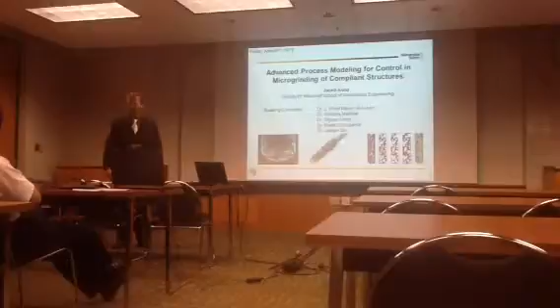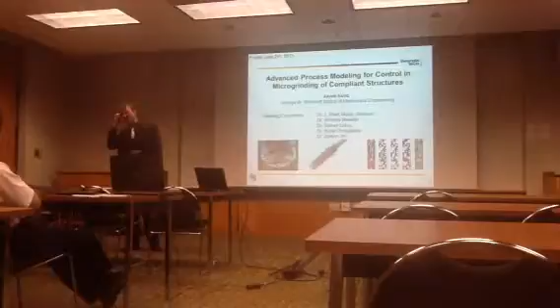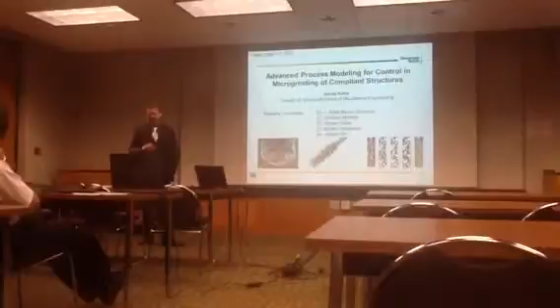The title of my thesis is Advanced Process Modeling for Control in Microgrinding of Compliant Structures. So the application, why do we need this?

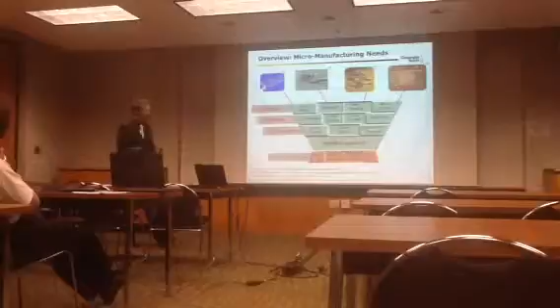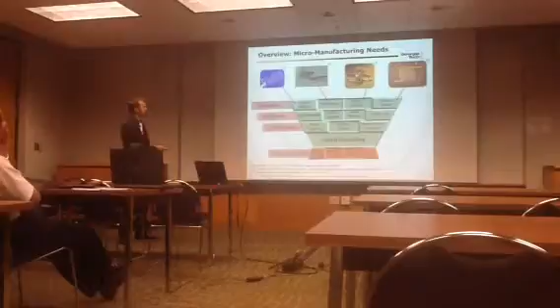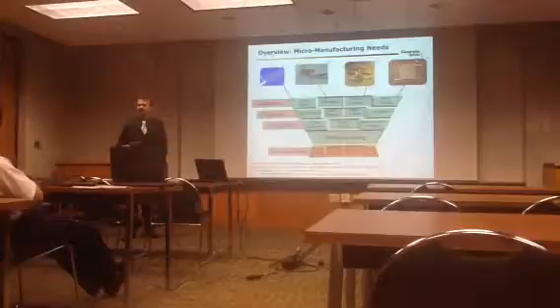There's a growing need in the micro part industry for very hard materials with high aspect ratio features. I've given examples in a couple of different industries. To make these micro high aspect ratio features in hard materials, we have process needs including super abrasives harder than the workpiece itself, precise control, and for sustainability purposes, doing this without large machines consuming a lot of energy.

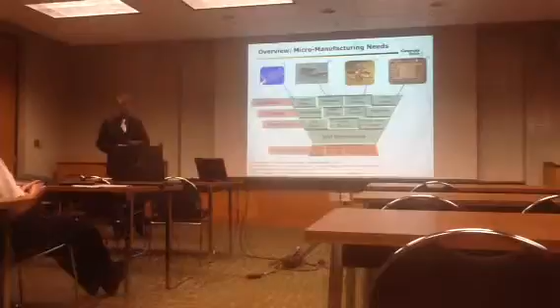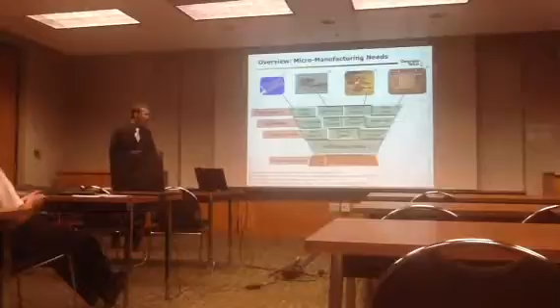I think high aspect ratio microgrinding fulfills this, and to facilitate that we need a couple of technology advancements. I've listed a few at the bottom, and what this work addresses is really the wheel model and the process dynamics.

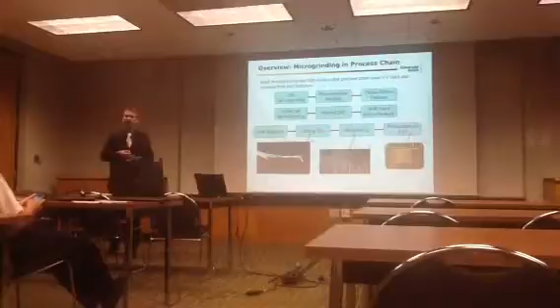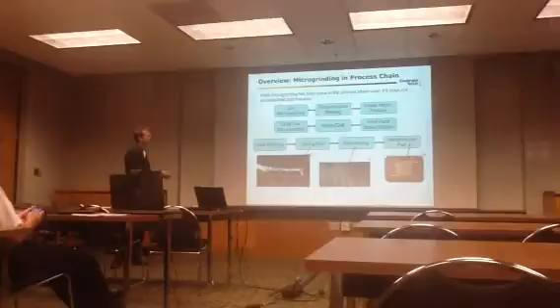Microgrinding itself doesn't have to be used to make final part geometries, but it's often inserted upstream in the process chain to make tools that then make microfeatures. For example, this copper microchannel heat exchanger was made by micromilling, and I'm proposing microgrinding could come upstream to actually make those tools.

For today's outline, I'll go through a quick introduction of microgrinding, then present a stochastic analytic model of the wheel topography, followed by actual measurements of microgrinding wheels to show whether or not that model is accurate. Then we'll go to stochastic modeling and measurement of dynamic wheel topography during actual grinding, ending with conclusions, a summary, and an outlook of where we go from here.

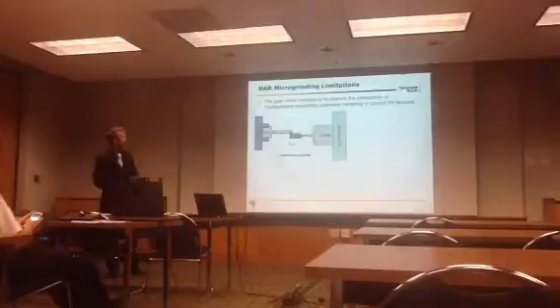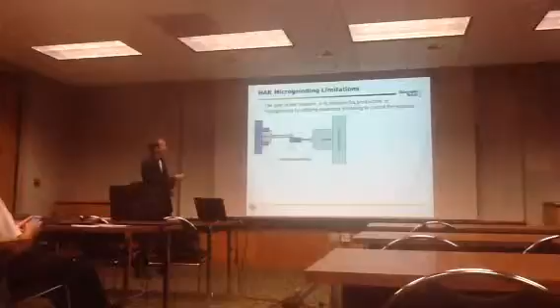So high aspect ratio microgrinding - this is what it actually looks like. We have a workpiece; by high aspect ratio I mean a small cross section with a very long workpiece, so a lot of compliance on the workpiece side. Microgrinding tools are themselves high aspect ratio, in ultra high speed spindles that also have a large amount of compliance.

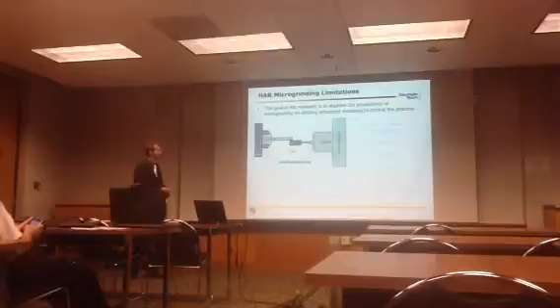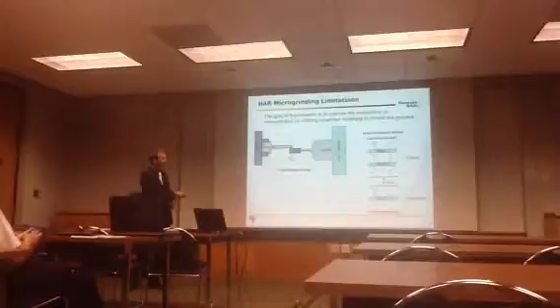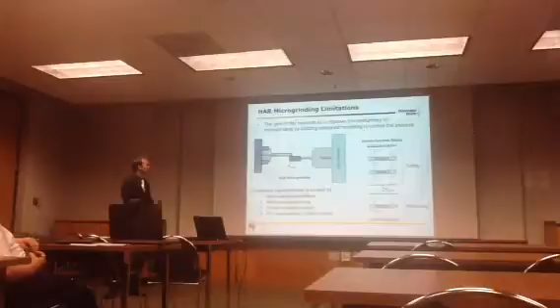If we model this system dynamically, we have several lumped masses, varying stiffnesses and damping, and linking these two systems is the grind force in the middle, so we need to understand that better. The limits of this process are really the stiffness of the fixturing, tool, and workpiece, and the ability to control all this compliance and understand the chatter coming from the driving force of the grinding action.

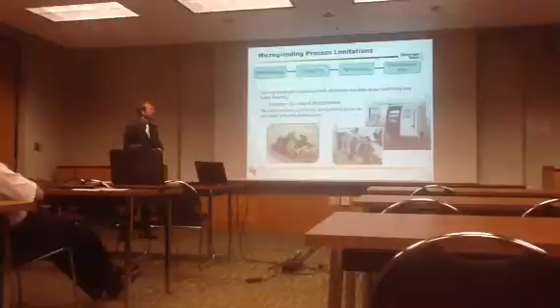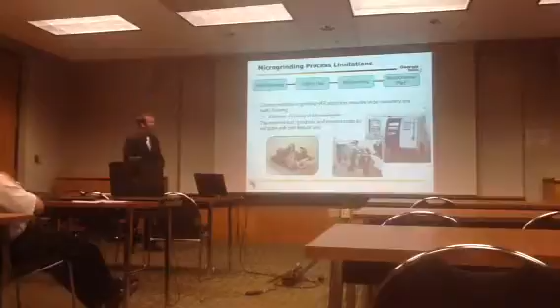Currently this is done on very large machine tools. For example, the grinding of a micro milling cutter is done on very large machines like the Roll-O-Matic. To deal with the compliance, they use a very complicated fixturing system - in fact, the workpiece itself is that tiny little pin down there, which you can't even see.

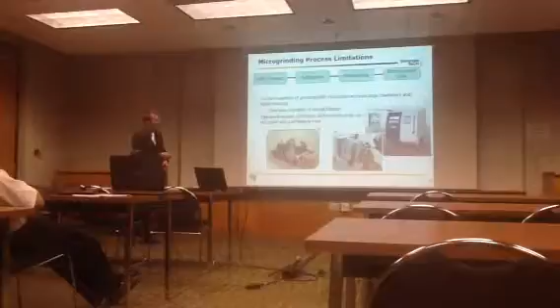Very cumbersome. What we're proposing is how we can take this macro process used to make micro tools and put it on a very small footprint in a micro factory.

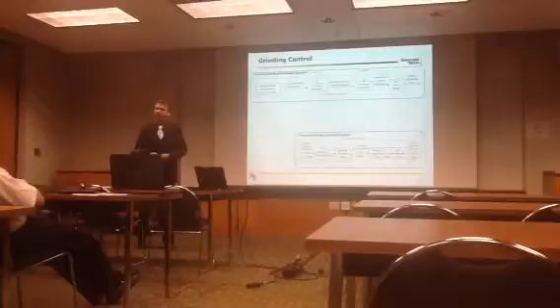Currently, grinding modeling is done by a very advanced user offline, doing lengthy wheel measurements and characterization of wheel topography, using general mean descriptors of a wheel such as the average static grit density, the average dynamic grit density, the average cutting force frequency, and actual cutting force - all averages.

They then set a desired depth of cut, and the control process only operates on the position control of the grinding system. Very limited process control.

So the big question I'd like to answer is, can we generate a stochastic model of the grinding process? And can we use that to aid in the ability to control and limit the probability of excessive cutting forces, the probability of different surface finishes?

Let's go back to a definition of what microgrinding actually is. This definition is presented by Dr. Park and Dr. Liang in Dr. Park's thesis. We're looking at wheels that have very large grits compared to the actual wheel diameter. Take a macro wheel and make the diameter really small, but use the same set of grits. That's what we're calling the definition of microgrinding.

This is really the effect we're going to find out in stochastic modeling that impacts the process.

To talk about the hypotheses of what complications this might present, imagine a milling cutter with 4 very distinct, well-defined teeth. If we model it, we can get a cutting force for each tooth, and we know that each is going to be about the same. On a macro wheel, there are so many grits that if we model it, we get a mean or average grit cutting force that holds for all these grits because the cutting frequencies are such a broad band. It looks like one flat line with a bunch of high frequency wiggles.

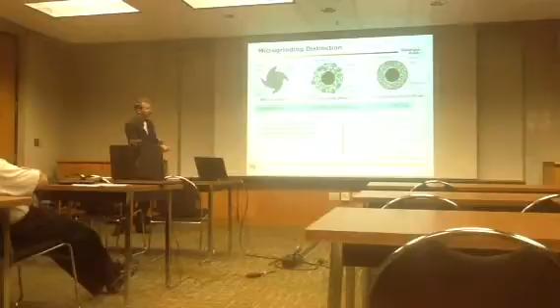As an example, imagine that if you wanted to determine the average grit diameter, you'd measure a bunch of grits and have a predicted mean. But if the wheel has a limited number of grits on it, you have to have an actual confidence interval on how confident you are that this is the actual mean. So when you have a micro wheel with a very small number of grits, your confidence interval gets very large. There can be a wide range of actual values.

Wheel topography has been studied extensively in the community since the 50s. The most common method of modeling relies on assuming the wheel has uniformly distributed grits, all with the same grit spacing and a mean grit protrusion height. Dr. Malkin's book covers this very well.

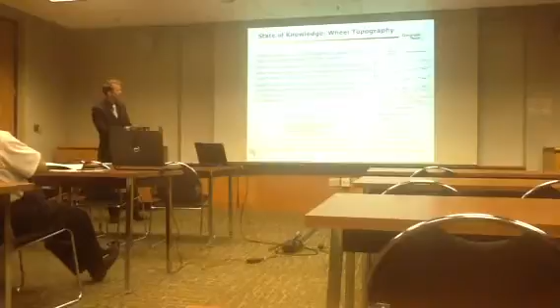But for microgrinding wheels, there's only been a limited number of studies, the most prominent one being imprint methods, where you take the wheel, roll it on a soft piece of material, and put that into a measurement system. For the dynamic side, to measure the actual number of grits that are cutting, the most prominent work by Dr. Park uses a micro thermocouple and measures individual heat pulses from each grit.

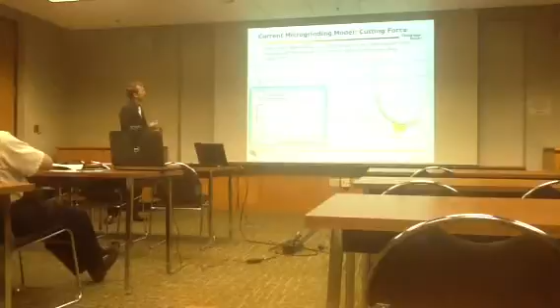So this is background on the work that has been done. For the actual grinding cutting force, Dr. Park in his thesis proposed a cutting force model that divides the deformation zone into a plastic deformation region and a more plowing region with a varying rake angle. What he comes up with is a force per grit as a function of its depth of cut.

So to generate a probabilistic model of microgrinding, we're going to accept this model of the force for each grit, and go back to the questions about the actual wheel topography itself.

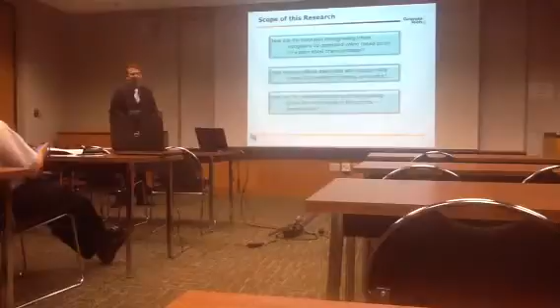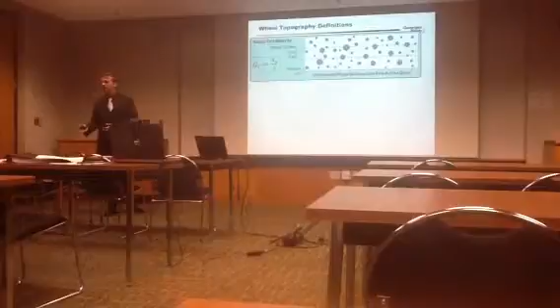So let's go into this stochastic analytic model real quick. First off, I was mentioning static grit densities and dynamic grit densities. Let's go over a definition of that real quick. Static grit density on the surface of the wheel is the number of grits per unit area. But in the grinding process...